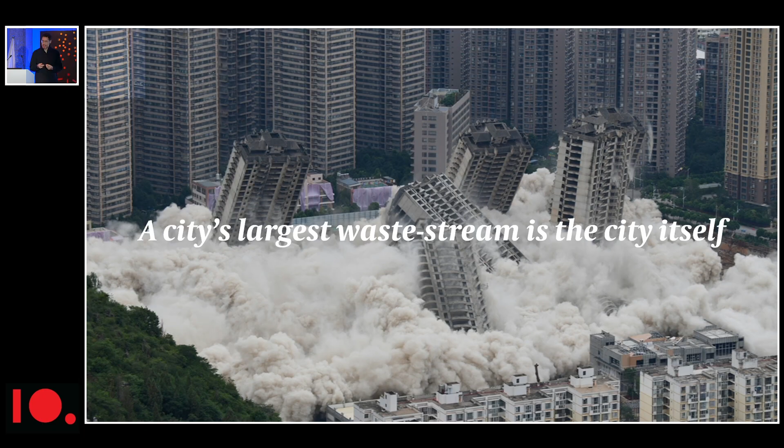One of the most important things, for me at least, is the environmental case. When you look at the statistics of established cities, after food waste, which comes and goes, you have this stream of resilient waste, the stuff that doesn't go away. Across Europe, and in fact America and most of the developed world, this is actually the largest form of waste. It represents not just physical waste, but also carbon, toxicity, effort and value that have been invested in the built fabric and then literally just torn away.

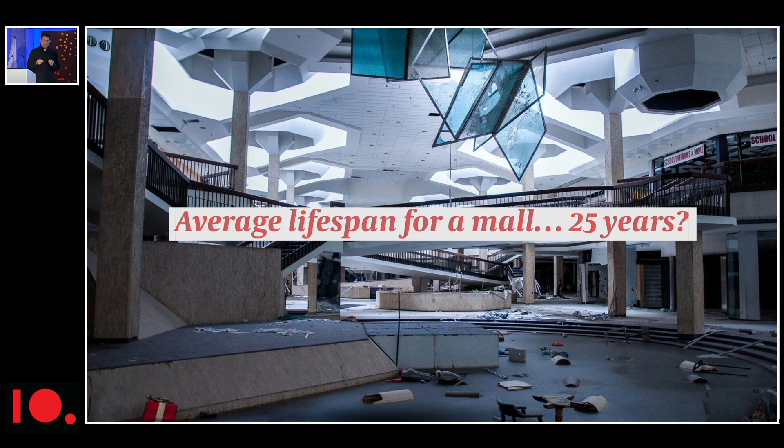The other part of the equation is that especially over the last couple of decades we've experienced massive shifts in the way that retail, work, lifestyles, industry, etc., have behaved and needed or required space to behave. So now we have a situation where lifespans are shortening because of the way we use the internet, because of AI, because of shifts in the way we behave at work, and COVID is an accelerator for that.

The vacancy is the chief instigator of demolition, and also of urban decay in general. So we have an obligation to be interested, as an architectural and AEC community, engineers, contractors, in the kinds of buildings that are the boring ones, the ones that don't have heritage protection, that don't have an immediate cultural value, because they have value in themselves as structures and in the cultural fabric of how they are and how they were used.

So what happens when buildings start to become vacant? You get this knock-on effect considered to be urban decay. It erodes tax bases, increases maintenance, and undermines the vitality of cities.

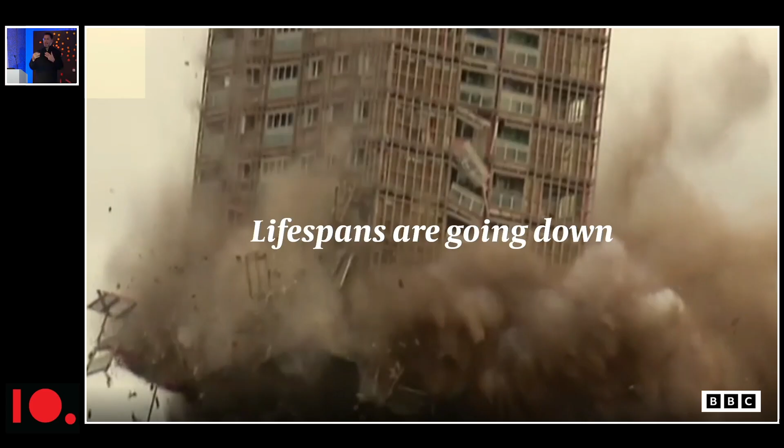This is what we understand as a kind of typological risk. It affects whole categories of buildings built for a particular purpose. The upshot is that it's not, say, the structural quality or the way the building was treated - it might be a perfect building - but nevertheless, the lifespans of these typologies are disappearing, going down. So the question behind this is, when we're talking about demolition, why is new build seen as cheaper than transformation?

If you take the innocent point of view, you might say a good quality building, structure is perfect, not degraded, should in all essence be cheaper to turn into something else than to demolish and build new. But we have an interesting history - it's been about 130 years since what you could call the world's first architectural deep fake.

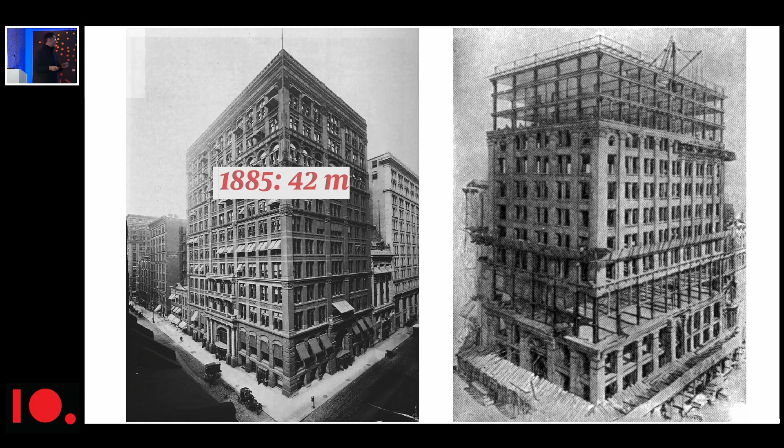And that is the idea that you have a building here, the world's first skyscraper. It was built in Chicago in 1885, and it looks like a building where the facade carries the load, but of course it's not. It's a curtain-walled building that was initiated as a typology.

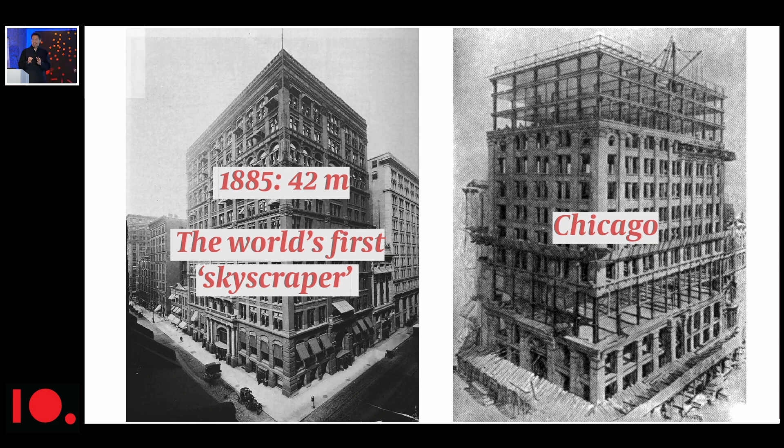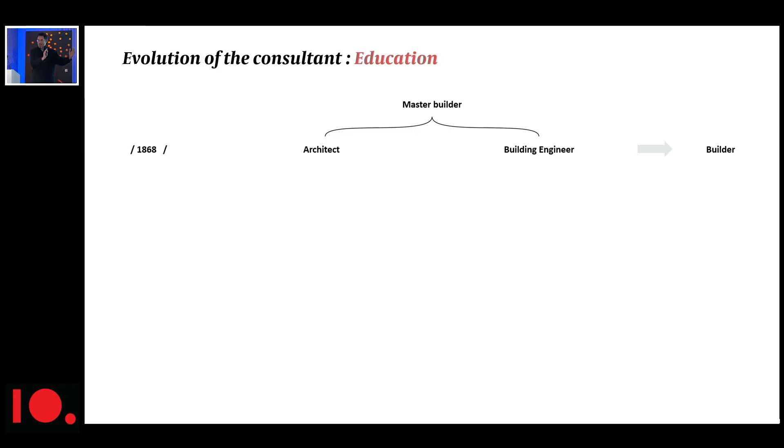It became extremely, you could call it viral, extremely popular way of building, and it represents the divorce of the architect from the engineer, so that the domain of one being in charge of space and form and the other being in charge of structure parted company in almost the same place at the same time.

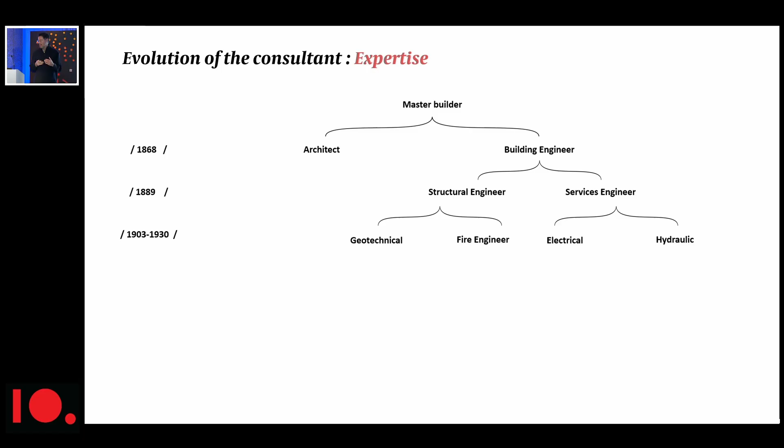And of course, very rapidly after that, through the late 80s to the 1930s, you start to get this proliferation of streams by which professionals divided themselves. Now, I guess most of the people in this room know this fact.

But the most important aspect of this is that when we consider what we do as practitioners, we as architects, we don't build buildings, we produce media. And this media has its boundary of legal and professional parameters. So this media is valuable for the industry.

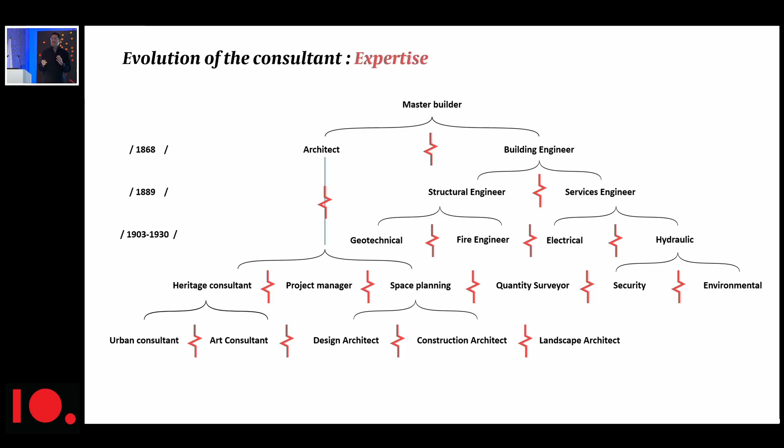But what it means is that the engineer, the electrical engineer, the fire engineer, the landscape architect, they all have ways of communicating with each other that are somehow parallel, and we have to communicate through these documents that we produce for each other. What that's very good for is producing new buildings.

It's very good for creating a single stream of information that goes from top to bottom, but it's not very good when it comes down to the nuances or difficulties of an existing building and how you might deal or transform that. And it's important to understand this framework because since the 1890s, 130 years ago, there have been a

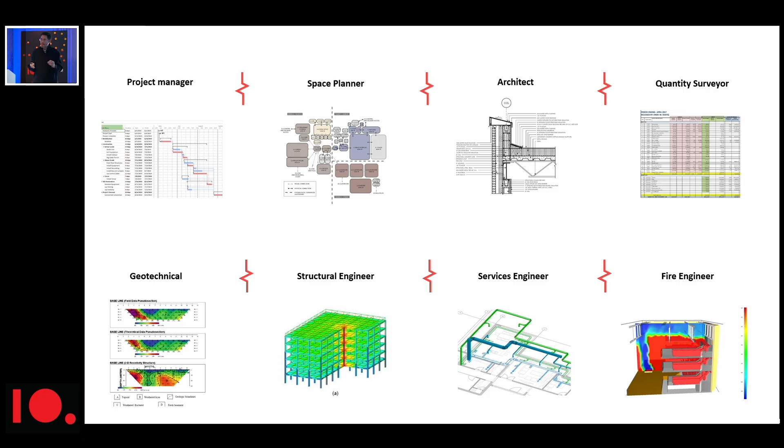whole system of taking our profession in the service of building new and turning it into a global material economy. So materials, finance, insurances, education, it's all wrapped up in being able to use systems that are in essence global. And these global systems have established boundaries that make it very difficult for one to communicate with another fluidly.

And the difficulty about transformation or adaptive reuse is that you need this cross-flow of communication because you cannot—every building, you might say, is unique and demands a unique synthesis of professional intervention.

So the decision to demolish in terms of building owners or portfolio owners is often made before it hits the table of the architect, the engineer, or the contractor. These decisions tend to happen more and more upstream in the portfolio management side of building decision making.

Recently, I would say that there's another nail in the coffin, another problem, and that is that it's no longer a good deal to be a developer anymore. It used to be, but now finance is shifting out of the development space and into the equity investment space.

This means that very, very large companies that own hundreds or sometimes thousands of buildings are making decisions across their portfolio. And what they're doing is essentially commodifying space and architecture. And the goal of commodity economics is to make each product exchangeable with the next in the very same way as gold can be bought, mined, sold anywhere, and it's more or less the same thing.

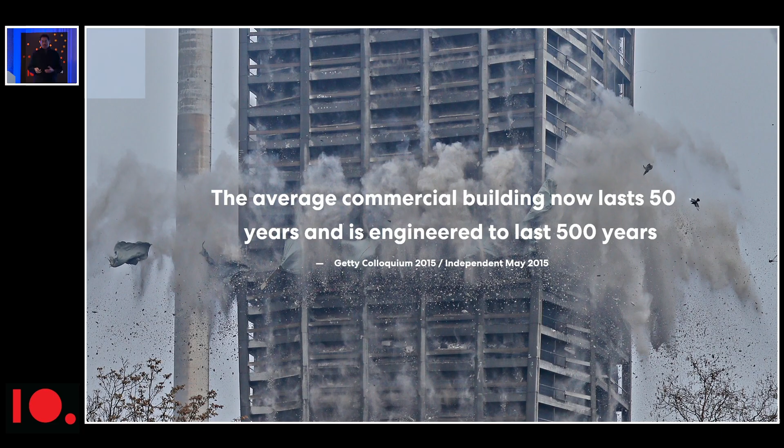So then the question is, what is the future for adaptive reuse? What is the future for transforming existing buildings into a new and viable future? One thing that is really changing the tide, the one thing that is

allowing adaptive reuse to become a stronger player, is a simple fact that materials are becoming much more expensive. And we now see that the war in Iran is playing havoc with oil prices, but not just that, material prices as well. Business as usual, of course, is no longer business as usual.

It means that if you're an investor and you're planning to build a building in 5 years, you have much less of an understanding of what materials will cost.

Another part of this is understanding that it's not just operational carbon, but embodied carbon, that will be a primary driver for how decisions and finance are made in future. The EPBD, this directive of the European Union, will include whole life carbon analysis, which includes embodied carbon. Suddenly finance and the industry will see a massive shift away from a single focus on performance and into the whole equation of a building, where embodied carbon is, I would say, the most important factor—because as energy grids decarbonize and electricity and heat become less carbon intensive, building materials become the hard-to-abate sector. It will demand more carbon than operating a building. This will become extremely forceful.

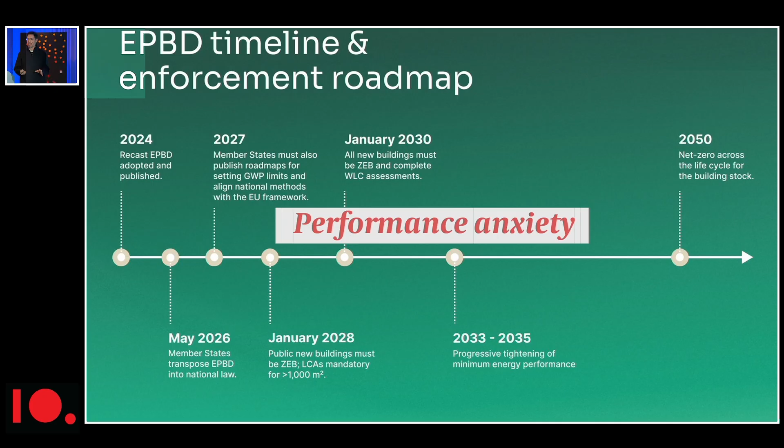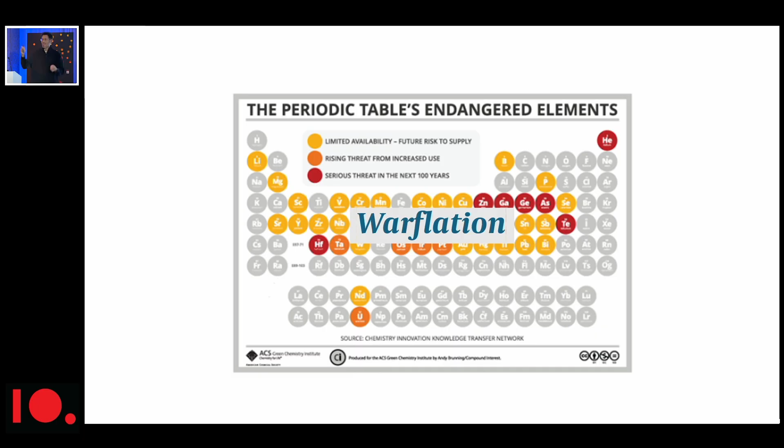The simple point is that regardless of what they cost, materials are running out. There is a black market in sand, and there has been for at least 10 years. Who would have thought that even 30 years ago, when the buildings we're discussing were being built? And of course, this new term, warflation, describes a situation where the logistics we rely on for a global material supply are starting to disappear. Suddenly, all these niche materials we want from Tibet, from India, from the Middle East—they're not available anymore.

So what is the question, or how do we, as an architectural practice, work to rectify the educational or systematic problem we have with our industry, which is so focused on building new? How do we re-educate ourselves, and how do we re-educate our clients?

Well, the first thing is perhaps a design question. It's almost an attitude—what qualities exist in the building? I'm talking about these unloved buildings, these B-class or C-class office towers or old malls. Isn't there something more fantastic we could do as architects than what exists, than how it exists as it was built? Maybe we can use our creative qualities to create a future that was better than the intended present.

The other part is actually the question of business case. The reason a lot of transformations aren't done, and the reason a lot of demolitions happen, is that at the moment we're very badly educated as an industry to estimate the cost of transformation, so the margin of error tends to be very wide. If that margin of error looks like it might create a negative profit, as opposed to a very small but guaranteed profit for new build, an investor will always move to new build. It's very risk averse.

But if we start to look at methods of analysis, not only can we minimize the margin of error, but the interesting thing is that, built out of this notion of cost in the first place, we see that in transformation the material value is very low and the labor value is very high—versus the opposite with new build, of course. So where you have inflation, material price rises, wars, or other factors, the concept of labor is much more stable than the concept of material prices.

And when we're talking about labor—because we have a 130-year history of optimizing for new build, and we haven't optimized in the same way for transformation—couldn't we use the technologies we currently have for a more efficient, better-planned execution of transformed buildings? So the question is, how do we ask a building what it wants to be?

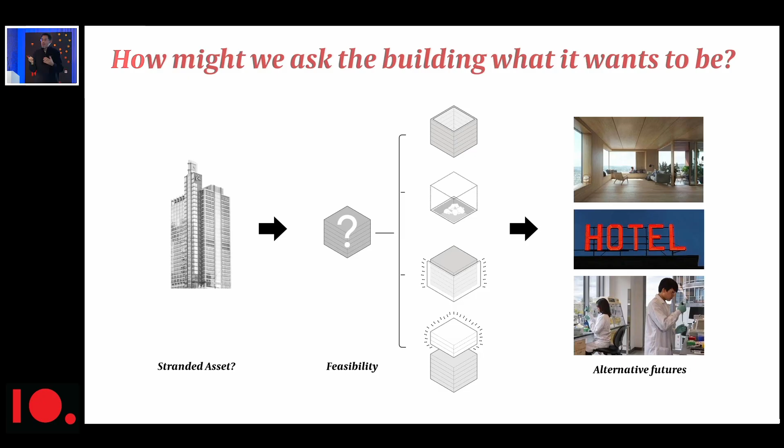I've been leading a group of researchers, scientists, and practitioners using AI to look at a building in its current form and run different models of the future—essentially asking the building what it wants to be, testing different variations, and working out how that responds in a financial analysis. There are many parts to this, of course. There's an urban layer.

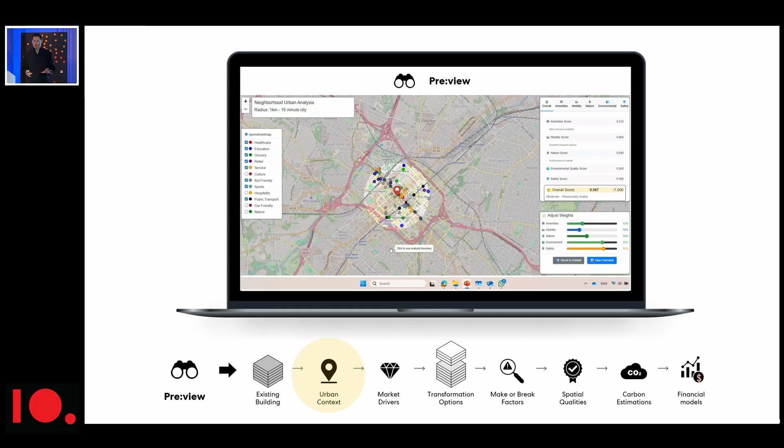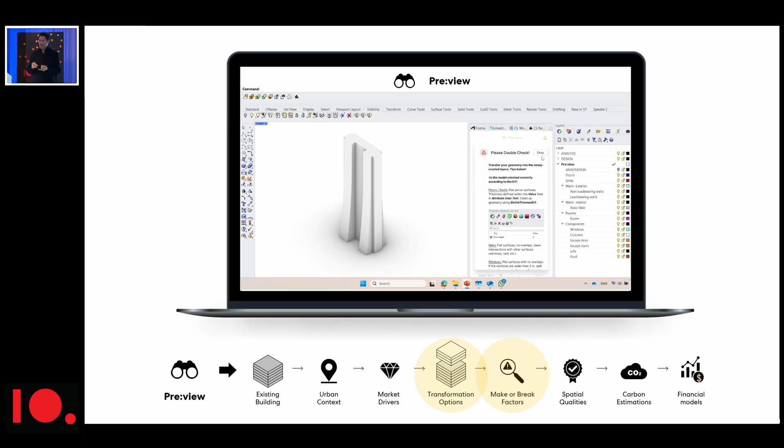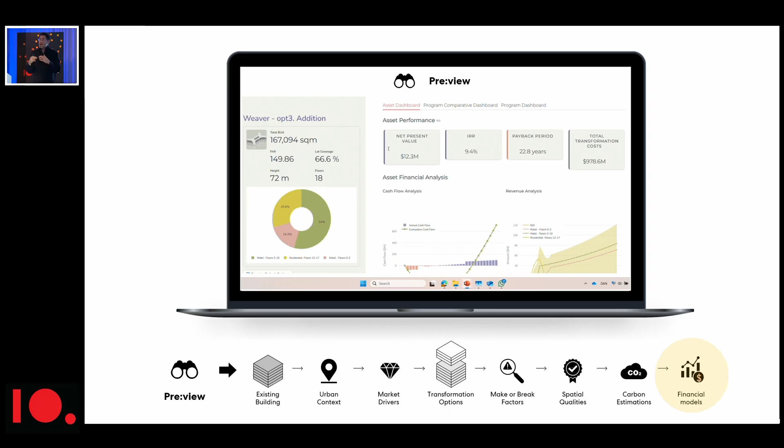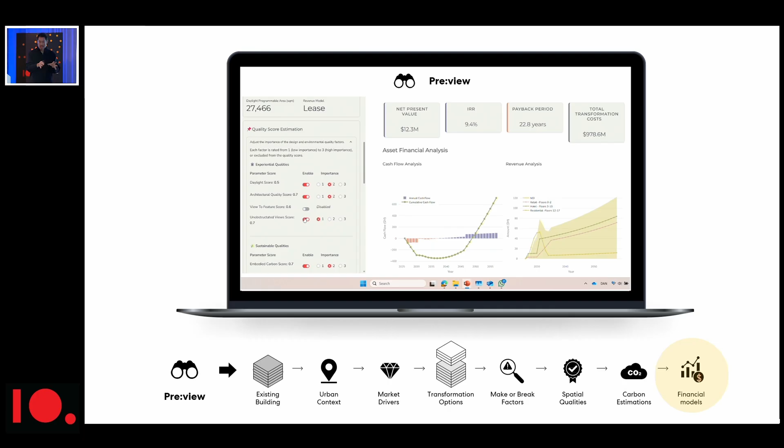There is looking at the make-or-break factors of transformation, such as building code, zoning, certain structural features. The idea is that when you make a transformation and change use, how does daylight affect the profitability of your space? How do views affect it? What can you carve out, or what can you add on, that will create a positive business case? And against carbon, what is the relationship between the amount of carbon spent in a transformation versus a new build of the same type? This is broken down, in a sophisticated way, into different models of finance.

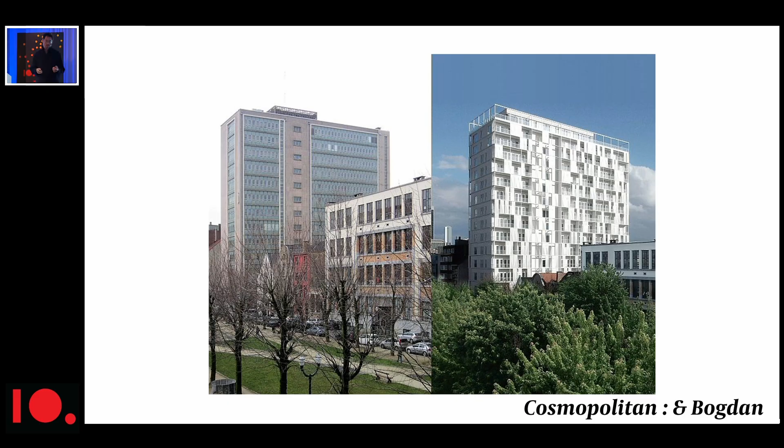So the last bit—I've got one minute to do all of this, I hope maybe two minutes—is the sorts of case studies I think are very valuable for this discussion. The first one, the Cosmopolitan, by Oana Bogdan and partners, realized this transformation quite some time ago, nearly 10 years now.

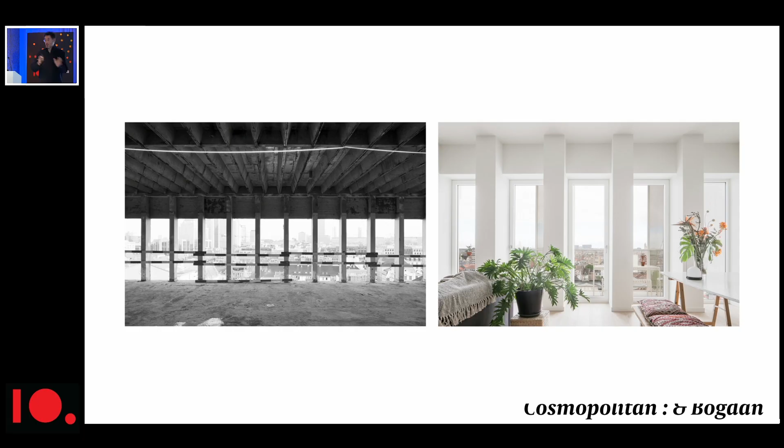An amazing renewal of the existing building, based on the idea that it was a profitability-based business case that allowed them to add on an extra layer, to strip things back, and to create a mix of apartments from affordable to market rate.

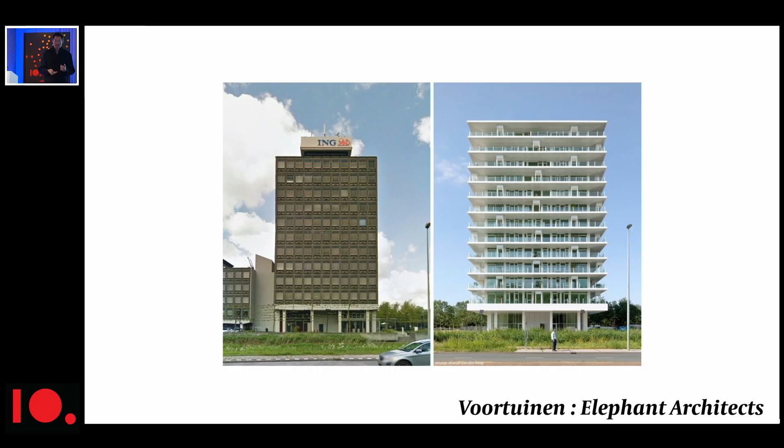It was a very cheap building in a very central location, and we see this over and over, if you remember the picture of Chicago. So much real estate is actually in very good locations, and we want to preserve the buildings that can take advantage of that. A similar story with Voortuinen, meaning the front gardens.

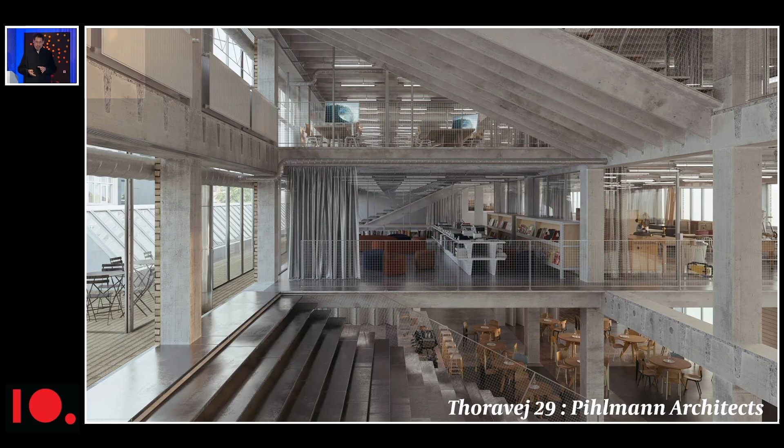Here it was a bank building that was turned over into apartments. One, local, from Denmark, Pihlmann Architects, was interesting because they took the most average, most boring building you could think of, on the outskirts of Copenhagen, and turned it into something spectacular simply by cutting the floors and turning them into staircases, among other things. So it was a radical reuse of material that created the identity of the building, not the facade.

So the idea that asking what qualities exist can be actually a design approach.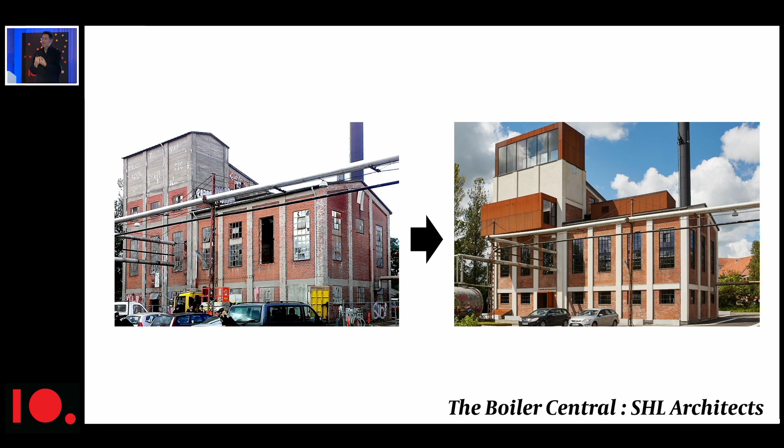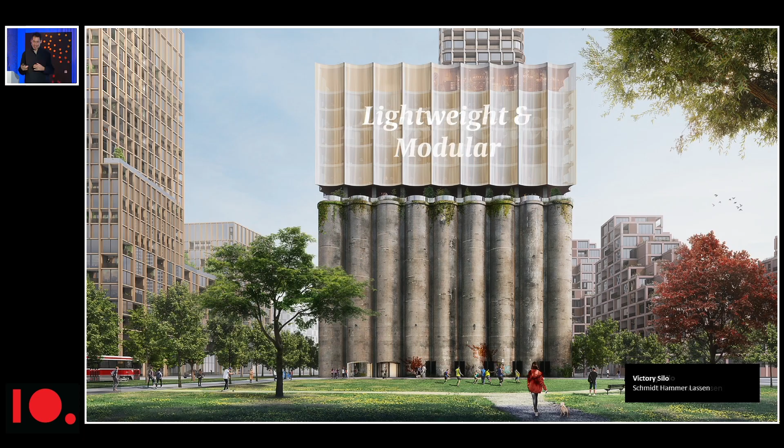Similarly, the Boiler Central, this was one of our projects, and the Spinnery Hall, two spaces that got converted for startups, where you can draw chalk on the ground, and as tenants grow and shrink, they can be accommodated in the space.

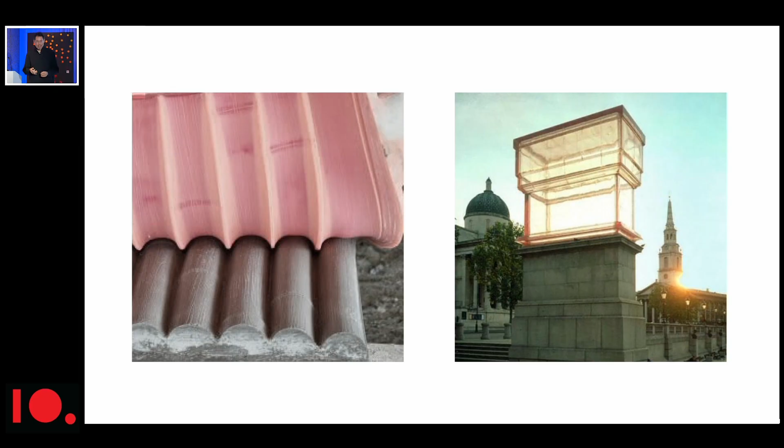And the notion that when we looked at the silos that weren't destroyed because it was literally too difficult to knock them down, how do you allow the structure to create a kind of landmark, a way of creating a center for the space from the existing silos, and looking at the idea of the negative, taking one and folding it up to be another.

Okay, so I'm nearly out of time. Oh, well, I'm definitely out of time. But this one is an interesting one.

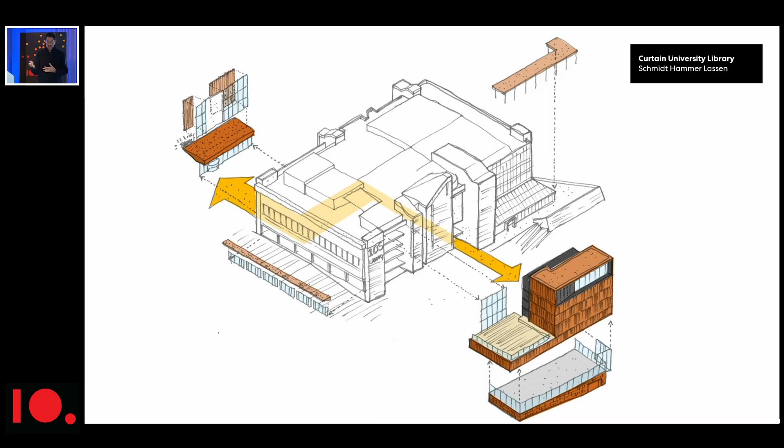It's a library which was failing because the HVAC system, the air conditioning, was not good enough. So instead of demolishing the library and building new, you just plug the air conditioning in, which had big spaces also for conferences etc., to make the building come alive again as a modern building.

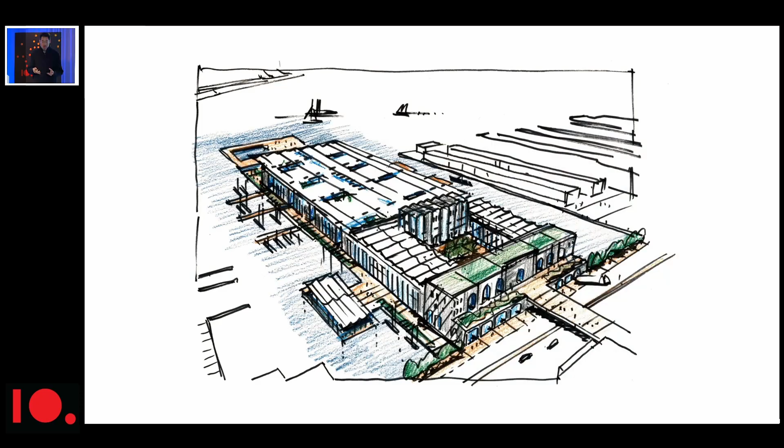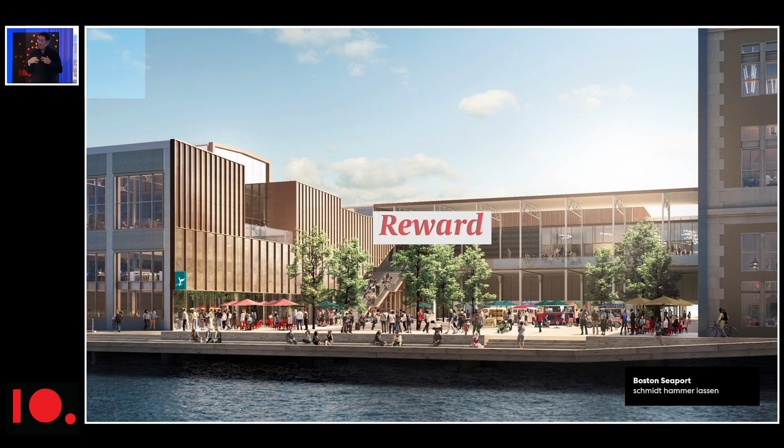And finally, this one, or second last maybe—one of the world's largest buildings when it was built in Boston, a pier building, had to be transformed by subtraction, not by adding more space, but to create higher quality space by pulling built fabric away so there could be a different kind of use on the inside. Extending the perimeter of the boardwalk was actually a very good thing for reintroducing the public to the water's edge.

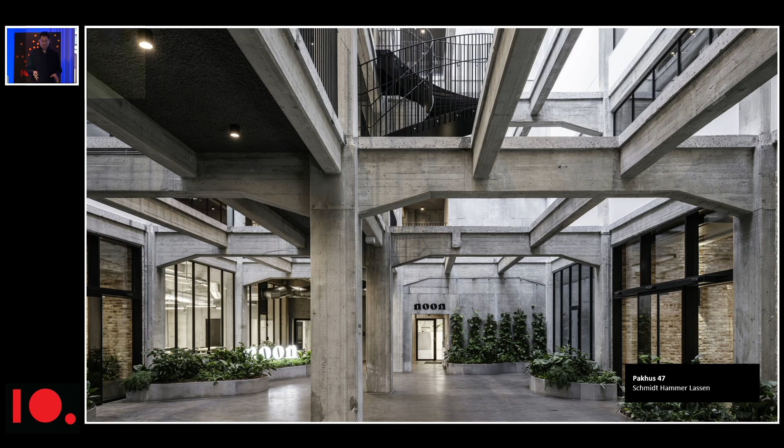Last one. This has just been opened in Copenhagen, and it's simply the idea that you can use a transformation as the icon for an area. So this became the magnet for new construction as well, simply because it had the most existing identity to bring forward into a new spatial plan.

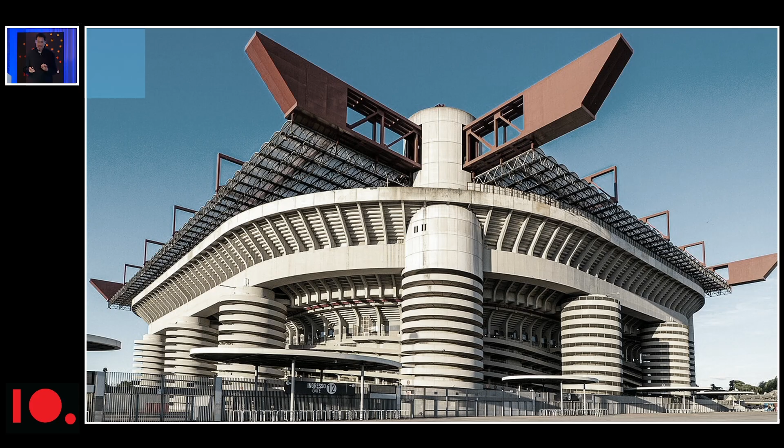Now that was the end of my lecture, but I just thought I'd add on to it a little bit more, because I understood a couple of days ago that a very important and famous arena in Split is under discussion about being demolished. And this is not a unique situation.

So here we have a building, the San Siro Stadium in Milan, a building that is set to be demolished. It's at high risk, and there's an enormous public outcry that is stopping demolition action from happening and forcing the government and the investors to look at keeping and renovating the building.

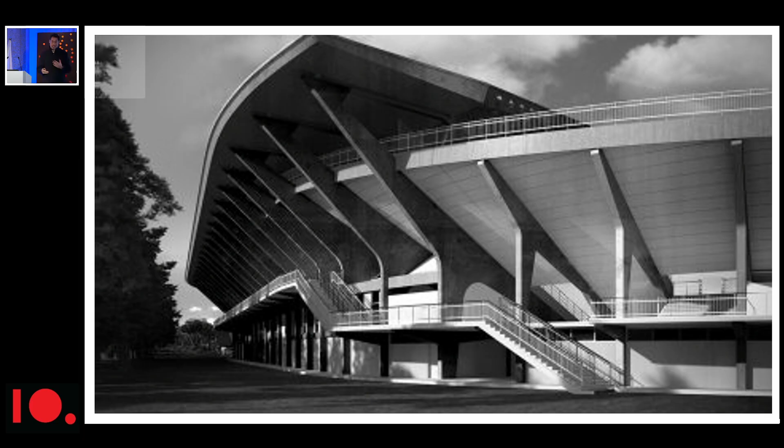Similarly, the person that brought me to architecture was actually an engineer, Pierluigi Nervi. This building is the Stadio Flaminio in Rome. This building is also looking at being demolished.

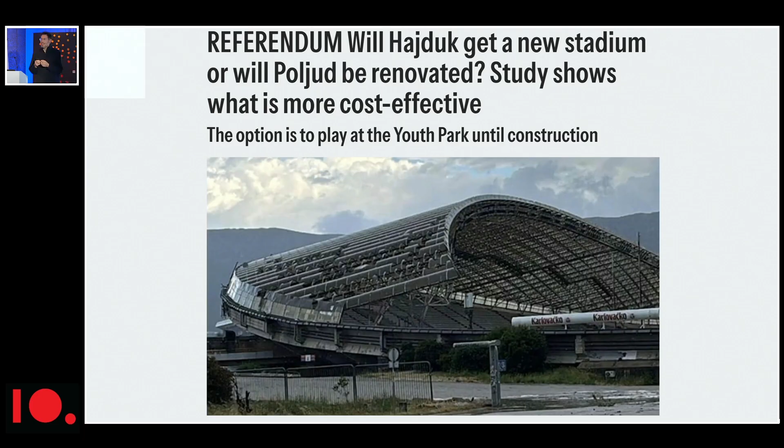But if you consider what it is about sports stadiums themselves, it's never a question of money, is it? Sports is not a productive industry, it's not like housing where it's a direct social need. It's something that a society pins its identity on, a sort of center of culture. Whether you spend one million here or two million, it doesn't really matter. What matters in this particular project, as far as I can see, is the brilliance of the architecture and the simple fact that the 206-meter span of this canopy never existed before this stadium was built.

This stadium is... at least I got a clap for something, you know.

But this stadium is not just a beautiful and well thought out architectural marvel by a brilliant architect, but it is the proof, of course, that Croatia is a leader technically as well as formally. And I think that this is something you need to hold on to, because anything in the future that is built that is world-class or dominates the architectural or engineering press will have the shoulders of this to stand on.

I think that's the end of my talk. Thank you.